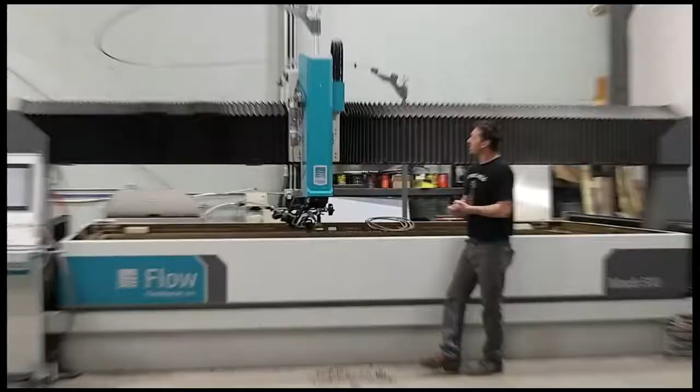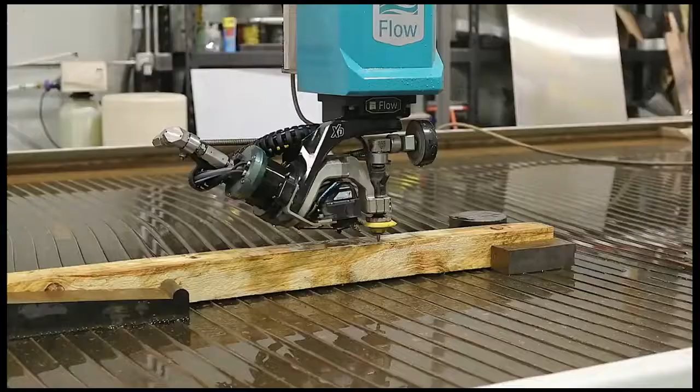Today we're going to be doing a question and answer about the Flow Mach 500 water jet that you see behind me. I'm going to be answering all your questions, from how did this big gigantic thing get into the shop? What kind of life support does it take to operate it? How do you operate it? What kind of material does it cut? How thick will it cut? How fast does it cut? And then just basically its overall operations. We'll take a part and we'll throw it in here and we'll actually cut it from start to finish, so stay tuned for that.

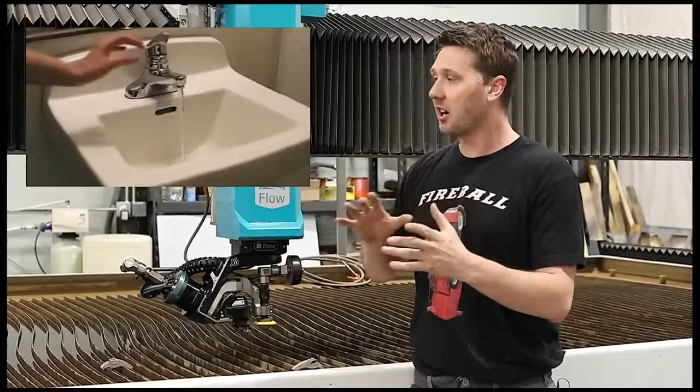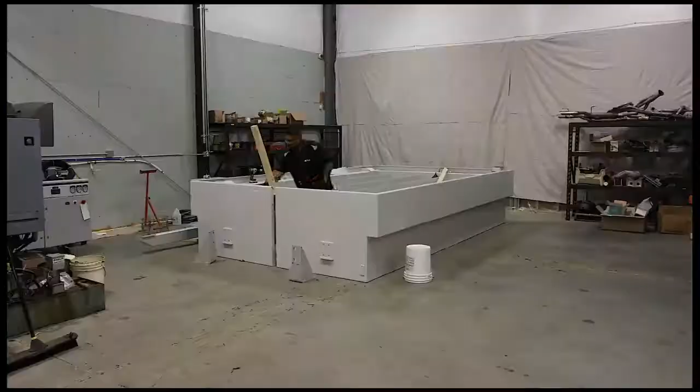So that leads me into the next question. As you can see, this machine is huge. How did I get it into this building? We'll walk through that question now. The machine showed up on a huge semi-truck. Each component was boxed individually in multiple wood boxes. We had two halves of the tank, the two supports for the gantry that get bolted to the floor, the Flow garnet hopper, and the 94,000 PSI intensifier pump.

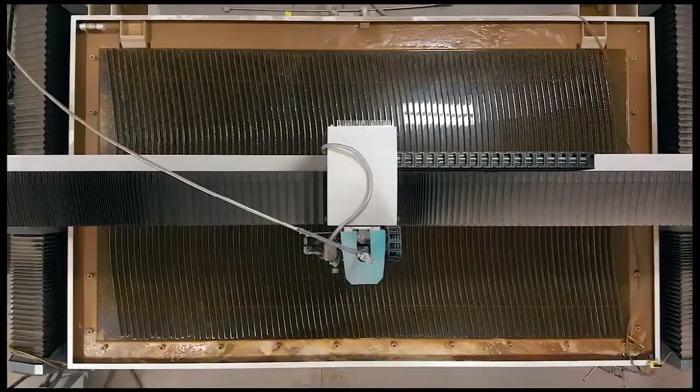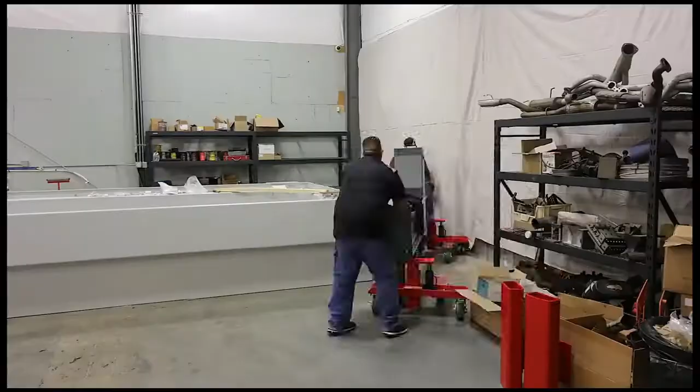The tank is approximately 20 feet long and 10 feet wide, with a cutting capacity of 8 feet by 12 feet. There was nothing special that needed to be done to the floor, as long as the floor was somewhat level. It's sitting on 3.5 inches of concrete. The machine itself, the moving components, are isolated from the water tank. It took about 2 to 3 days to install the machine.

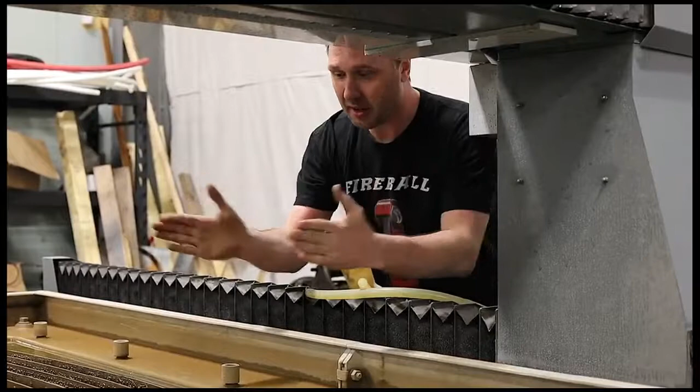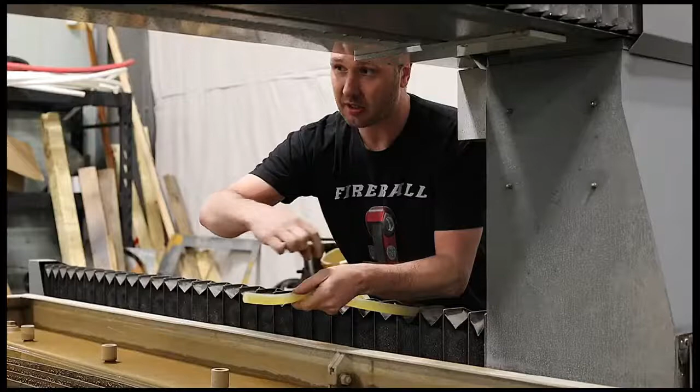We just bolted the two tanks together with this cool gasket. They smashed this piece of hard rubber. It almost feels like a glue stick. And it's one big, huge, long piece that drapes and goes in between the two parts, and then they get bolted together. And this piece of rubber, some fancy rubber, gets smashed into like a pancake, and then they put a piece of 1/2 inch flat bar so that the water jet doesn't cut it. And yes, this machine will cut the floor of this tank if it's held in one spot too long through the water. In some cases I've heard that customers that own these things will put AR plate down on the floor.

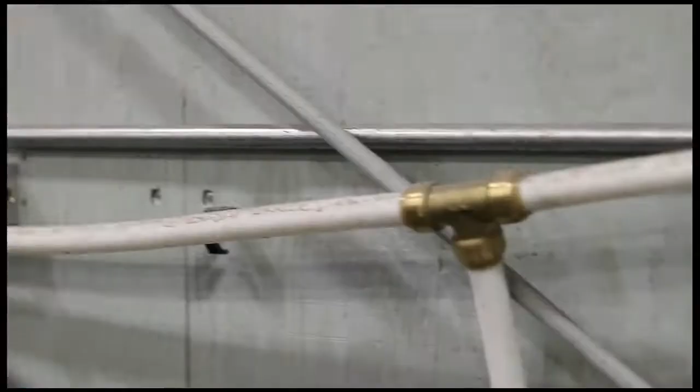One of the questions I get all the time is, how much water does this thing use? It is a water jet, right? But it actually doesn't really use that much. It just uses the water line from the building, which is about 15 gallons a minute, but it really only takes about 5 gallons a minute to support this machine. The first place the water goes from the building is this water filter over here. You don't really need filtered water if you've got clean water, but it just helps keep the components a little bit cleaner. And then from the water filter it enters the intensifier pump.

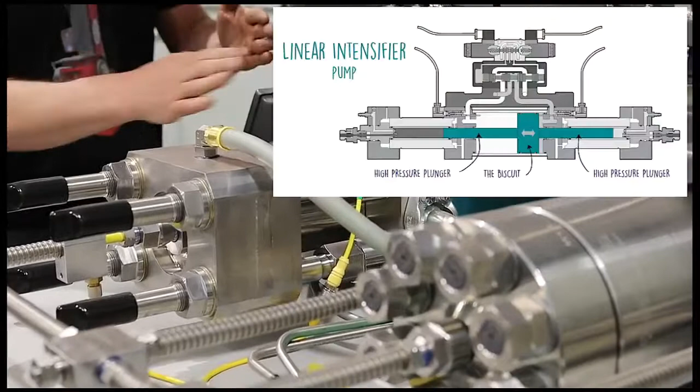This is where all the magic happens. This is what makes this cool, the 94,000 PSI intensifier pump. How this thing works is a 50 horsepower electric motor that's run off of 100 amps from the building. The hydraulic pump pressurizes the pistons inside here, and this piston moves back and forth. At the ends of those pistons it's necked down to a smaller rod, so we're gaining some mechanical advantage, and that is now compressing the water, sending the water out the lines and into this accumulator.

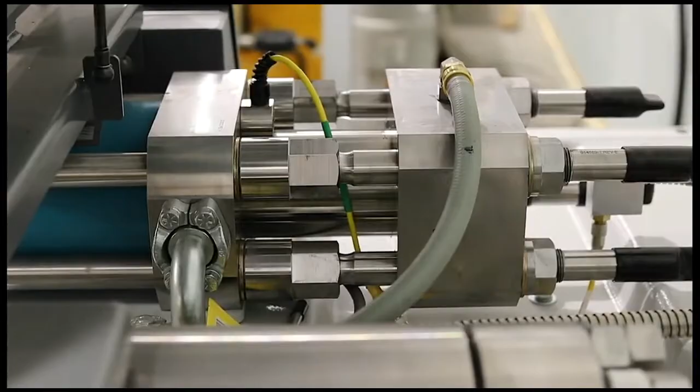The accumulator's job is to take the pulses out of the strokes from the intensifier and basically give the cutting nozzle clean, pulse-free 94,000 PSI water. Once you get to about 400-500 hours, it takes about an hour and a half, and you can rebuild the pump right here in the shop. And it's pretty cheap to actually rebuild these things. I just got back from a class to learn how to do it myself, so I'm excited to be able to maintain the pump myself right here in the shop.

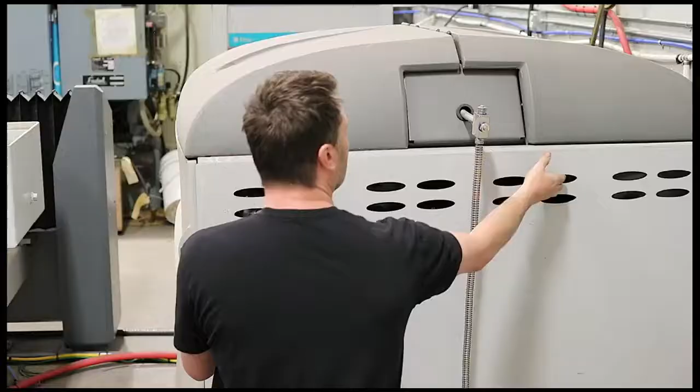Let's take a look inside at the hydraulics. So this is pretty cool. There's our big 50 horsepower motor. That thing's awesome. And then our hydraulic pump. What we also have is the water coming in from the filter.

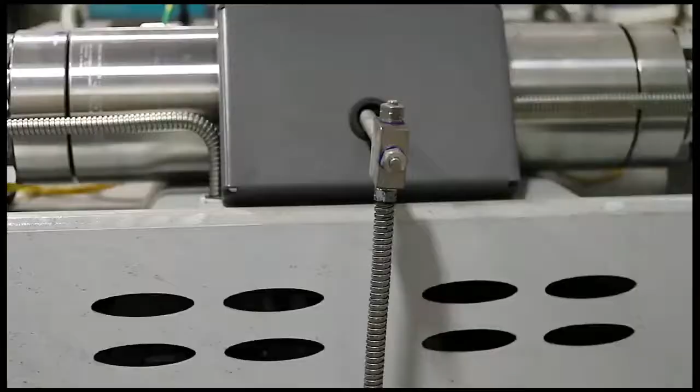It's going through a coolant system, and the coolant is just keeping the pump cool. The intensifier pump does not recycle tank water. It's always seeing clear, clean water. So out of the accumulator, the water is now pressurized and it hops into these hard lines, and this is it. This is where the water goes.

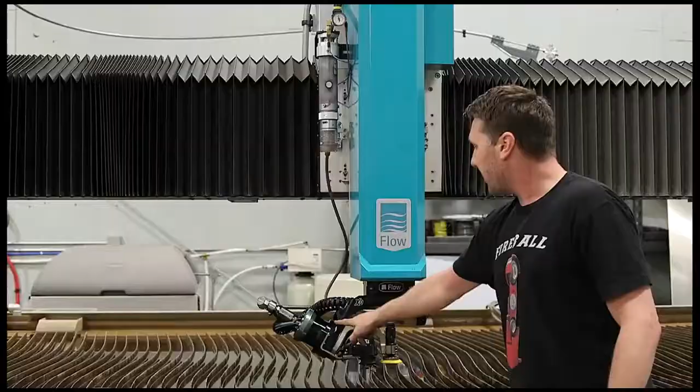It follows the hard lines up and into what we call the whip stand, this flexible flagpole, and it follows the gantry. When the gantry is moving, it gives that flexibility so this hard line doesn't get a kink in it. The water enters the movable head of the gantry, what we call the Z-axis, and it's still hard lined into this 5-axis XD cutting head, which is going to be able to rotate in 5 dimensions, and it enters this cutting nozzle right here.

The garnet and the water are mixing together, and it's exiting out of this nozzle at way above the speed of sound, combining into this stream, and this is what actually does the cutting. So now let's talk about how the garnet actually gets here also. It has its own path to the cutting head. So let's go talk about that now.

Why do we need garnet? Well, garnet is an abrasive. It's a hard natural mineral that gets mined, and the garnet is what's actually hitting the material and causing some erosion to whatever we're cutting. The more garnet you can throw at it, typically the faster you can cut, or you can combine it with water and speed up that garnet even faster and make it cut faster that way too.

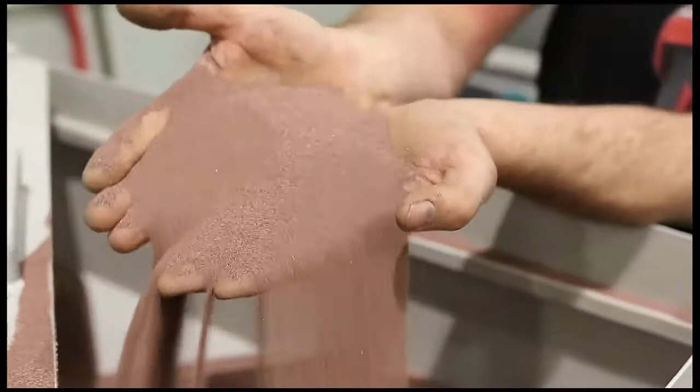So this is a 2,000-pound pallet. I choose to get the garnet in bags, so it's just easier to handle for me. You can get big sacks of just straight garnet that is not individually wrapped. Okay, this is what the garnet looks like. It's kind of hard to see, right? This will actually hold, what, 800 pounds? It doesn't look like it, but it'll hold quite a bit.

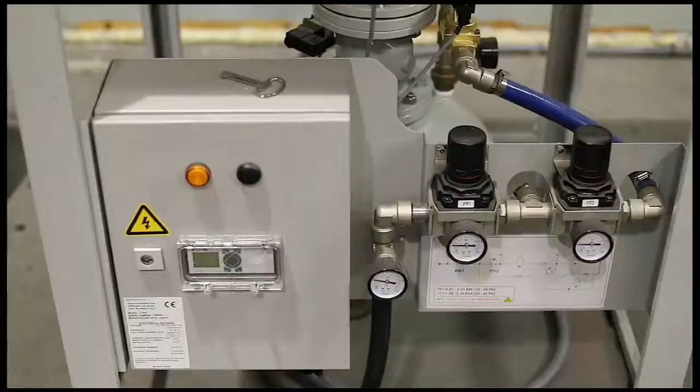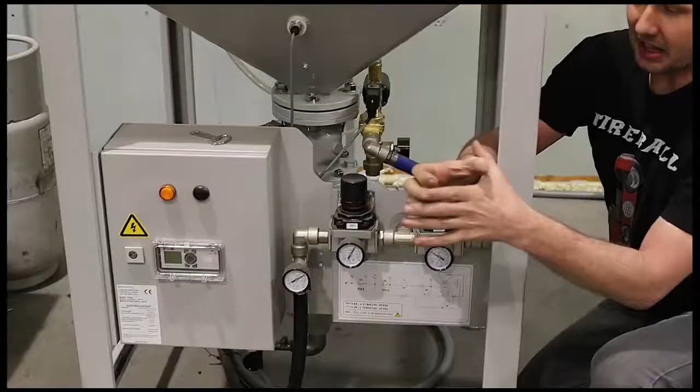The hopper has a warning light, so when it does get low, here's the sensor right here, it just beeps at you and says, hey, you're running low on garnet. You probably still have a good hour's worth of cutting when that light comes on, so it's just more annoying than anything. There's a diaphragm in here, like a bladder. It's a rubber bladder that squeezes just like that. When it's asking for more garnet flow to the head, the bladder opens up and it closes. And it does that from air pressure.

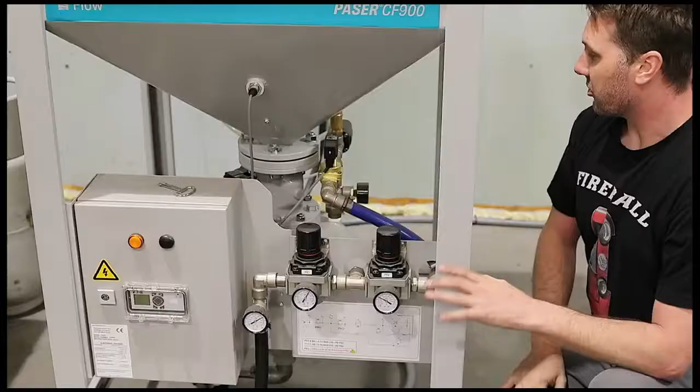So the shop air, you need quite a bit. I have a 53 CFM rotary screw air compressor here in the shop. I'm thinking you probably need at least 20 CFM to be able to run this machine and your other shop tools. And it needs clean, dry air to operate. But that's basically how it works.

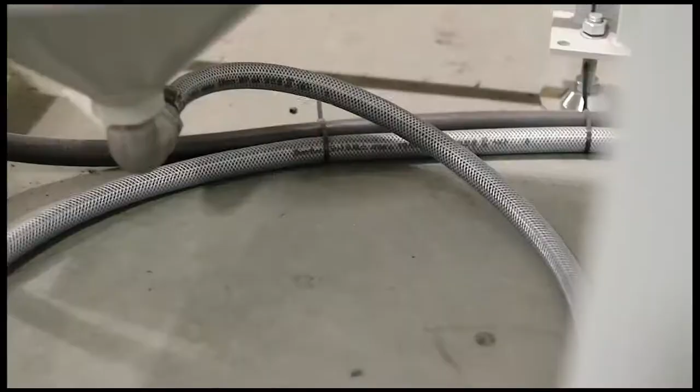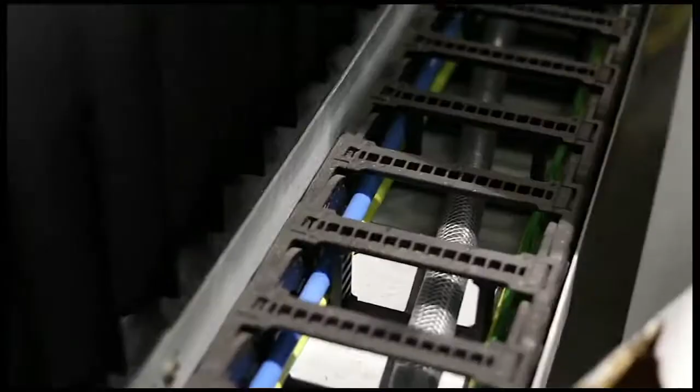When the computer control is asking for garnet, it gets funneled down into this hose. You can see it's just draped down here on the floor, and then it runs behind me in this clear hose. This is all full of garnet. It makes its way through the machine and through the track, getting pushed up by vacuum and air pressure into the machine and into the gantry, up and over and in. And you can see the garnet come into this little mixing chamber right here.

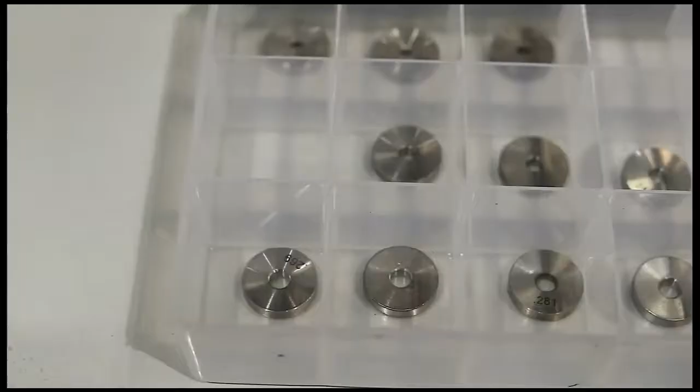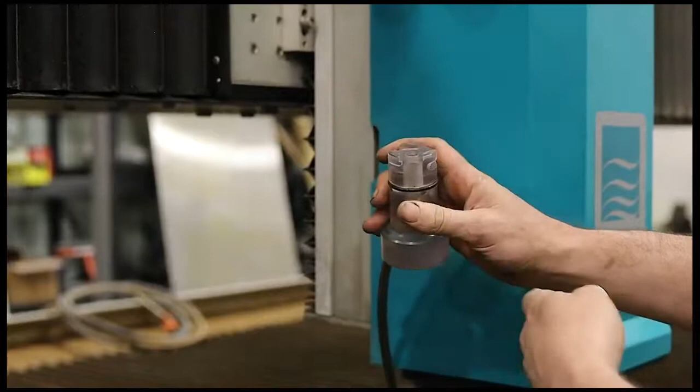If we take this off, you have what you call a metering disc. This is what controls how much garnet is getting sucked into the machine, because remember, this has a vacuum. It would suck your finger. Picture it like a carburetor in a car. You don't want to run too rich, and you don't want to be too lean either, because the computer knows how much garnet is supposed to be flowing. So it's going to change its speed according to the thickness of the material. And when you get a clog, you take this apart, blow the line out, and you're up and running again.

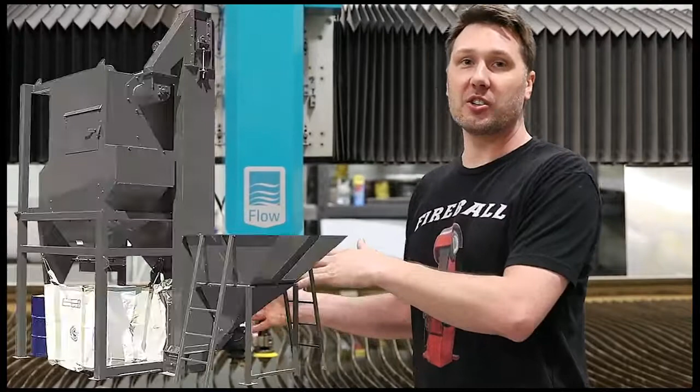Is the garnet reusable after it's come out of the nozzle? Can you recycle it? The answer is yes and no. There are machines now where you can clean the tank out and put this garnet in, and it will separate all the yuckies from the good. You can imagine what's in the bottom of this tank: aluminum filings, steel, wood, plastic, foam, a whole bunch of stuff stuck in with the garnet. Garnet is just one of those things. You want it clean.

That's one, you don't want to have problems. And two, when that garnet hits the material, it basically explodes. So it doesn't have the mass that it may need to be able to cut again. So yes and no, but mostly no, you cannot reuse it.

There's a few ways to get the garnet out of the tank, and so you can imagine that once the tank starts to get full, you're going to want to remove it. The cheapest way, kind of, is just to literally remove the slats and use a shovel and shovel it into a bucket or a trash can and then haul it to the dump. You can tell that every pallet of garnet that goes in is going to end up at the bottom, so that can take a while.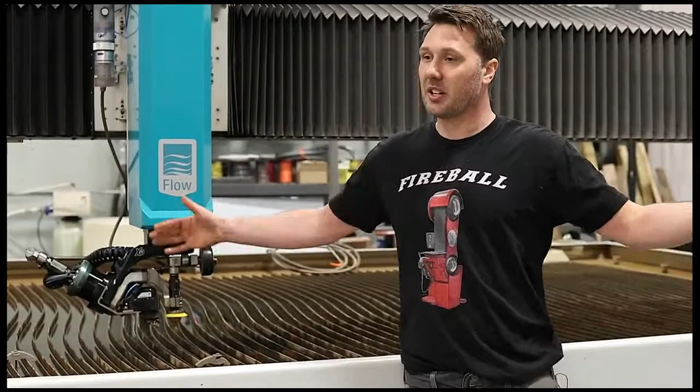Another way to do it is I've seen guys have an excavator. They'll literally scoop it out like it's dirt and haul it away that way. The next way is you can actually buy from Flow an auger system, where it's continually cleaning the tank basically and depositing the garnet outside of the tank into a big dumpster container in a big plastic bag, and then you can haul it away that way.

Or the best way Flow recommended to me is to bring in the septic tank guys or the vacuum suckers, and they'll literally just vacuum the slurry out of the bottom of the tank, and you do that bi-yearly, once a year, every 3 months, depending on how much garnet you're dumping into this thing.

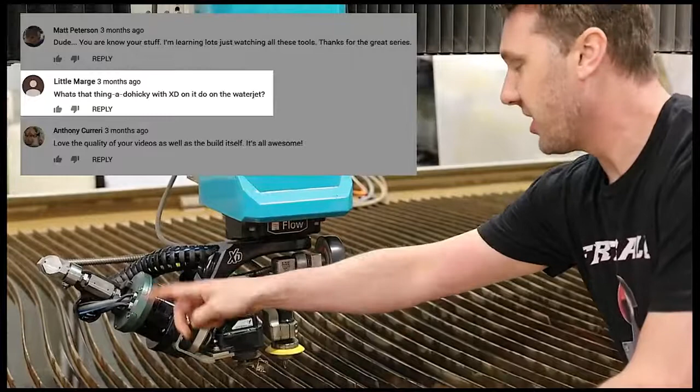You guys asked me, what is all this thingamadoohickey hanging off the side of the cutting jet? This is an XD 5-axis head, and so it tilts back and forth from this joint right here, and then it actually pivots up at the top right here. What this allows you to do is this cutting jet is now able to cut in any degree up to 60 degrees. So this can lay over 60 degrees at any angle.

This is an accessory that Flow sells. This is called the compass, and you put this attachment on the end here, and it goes around the nozzle, and it floats up and down, follows your material, and it helps keep you from crashing the nozzle into your part.

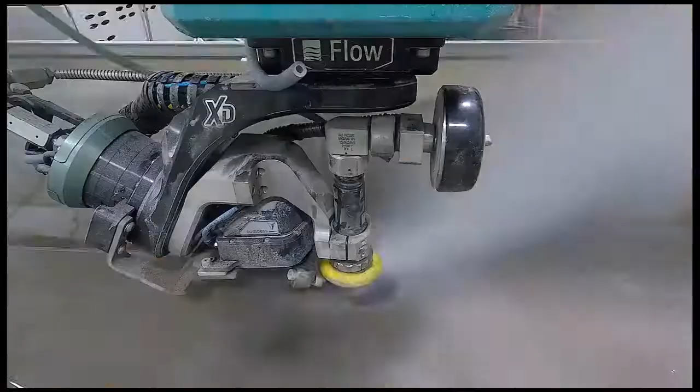The 5-axis helps with taper, because anytime you cut, the water is actually causing a taper. This has a compensation for removing the taper out of a part. So that's why you're seeing this thing dance all over the place, it's optimizing your cutting angle. Picture the cutting angle as the water hits the part, and then the garnet and the water lose speed, and it kind of trails off. So it's trying to keep that trail straight and perpendicular to the part.

This is what I call the blast shield, because this nozzle will lay over that far. It's kind of like an umbrella to try to keep some of the spray down. And these are just a consumable item for that. The cutting head has what we call an orifice, and this is the first thing that the water sees, and this is what actually builds up the pressure here, and it looks something like this.

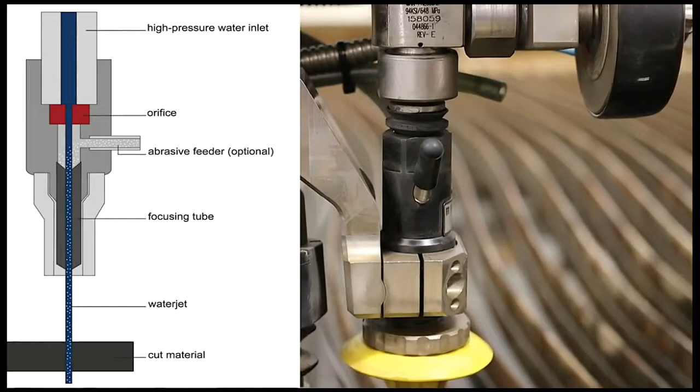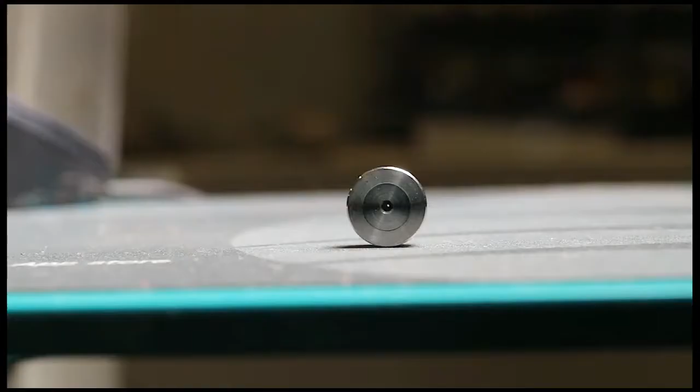Okay, so check this out. Inside that cutting head you have your diamond orifice, which is 10 thousandths of an inch. There is actually a little tiny diamond in there, and the water now has to move through this little tiny orifice. This is what pumps up the pressure, and this is like holding your thumb over the end of the hose. Now, there is a space between the diamond orifice, what sits up in here in this head, and the mixing tube. So because there is a space in here, it's going to actually cause a vacuum, because that water is moving so fast now, and it actually will suck garnet into this chamber.

There's a hose back here. This is the garnet flow. I can pull it off. There we go. You can see there's a hose that sits like that. So if we want to cut with garnet, we have the option there, and this is how it gets into the water mixture, is from vacuum between the diamond orifice and the tungsten carbide mixing tube.

This is an air actuator. This is actually what turns the water on to the nozzle. There's a little plunger in here that allows the water to go down, and this is air controlled.

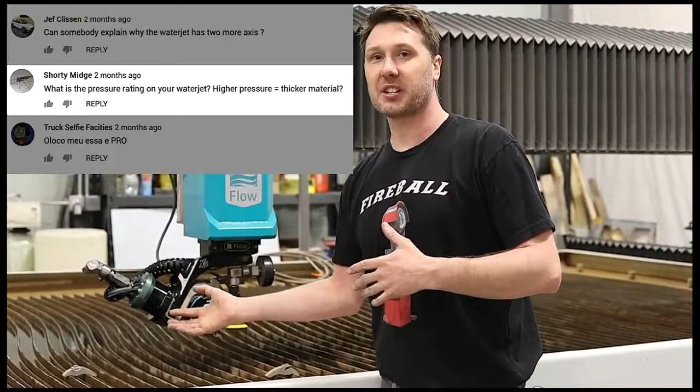What is the benefit of having 94,000 psi of water pressure and the garnet? To answer the first question, the higher the water pressure, it will help with cutting. So it's kind of debatable, that, oh, you don't need much water pressure, you just need to throw more garnet at it, because the garnet is actually what's doing the cutting.

It's like an abrasive or sandpaper. There really isn't any cutting action going on. It's more of just kind of sanding the thing apart. But there may be times where you don't need garnet as the cutting media. You can run just straight water. So a lot of food processing plants, if you can cut a material with scissors, you can run just straight water. So the higher the water pressure is, the thicker or more dense material you can cut with just water.

And it's debated that you don't need this much water pressure, but if you think about it, the evolution of water jet machines is they've gone from 20, 30, 40, 50, 94, and I know that they're working on 120,000 PSI water jet cutters right now. So it's naturally the evolution of the machine. The more water pressure, the better.

Having the higher water pressure doesn't necessarily mean faster cutting times. It's just going to help you with garnet consumable. It's going to help you not have to use so much garnet. This uses a little bit less than 1 pound a minute of flow rate of garnet. So if you can cut that down, it's going to save you money on cutting parts as your overhead costs.

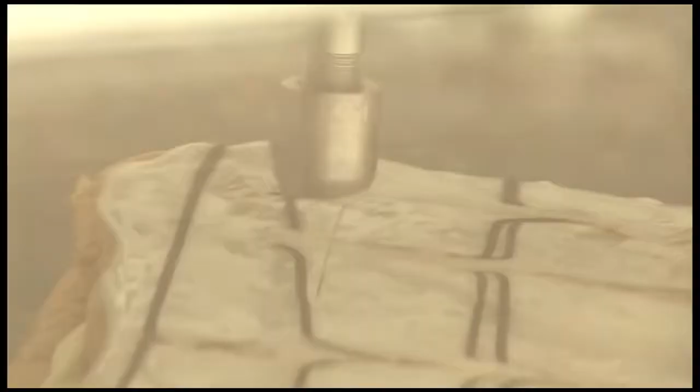One of the most popular questions that's come through is what can this machine actually cut? And the answer really is just about anything. Everything from metal to food. So this machine gets used in food processing. Believe it or not, your chicken nuggets that you eat are probably cut on a water jet. The cheesecake gets cut on a water jet.

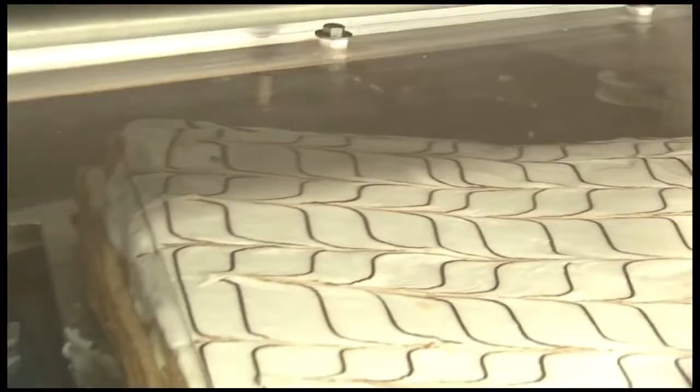Thick material like steel, no problem. This machine's capability is about 1.5 inches. I have cut a 3-inch thick plate with it. The thicker the material, just the slower it goes. What I've noticed is it's cutting about the speed of a bandsaw. I can change the surface finish how I want it to be. If I want it to be a smooth cut like that, I just slow the machine down a little bit. So that's some versatility there.

It's not limited just to cutting a piece of solid. You can stack sheet metal on top of each other and it'll just blast through layers of material. It really doesn't care. Like I said, if you're not careful, it'll cut through your material and through the floor of the machine if you keep it in one place too long. So it really is not limited by the thickness.

Tube steel, you can cut through one side of tube steel and it'll poke out the other side, which is good and bad. Sometimes if you don't want it to cut through a layer, you're going to have to add a diffuser material in between. So just picture that nozzle, that water, like a laser beam. When you shine it through, it's just going to keep going.

The material doesn't have to be clean that the water jet cuts. As you can see, it's rusty. There can be mill scale on it. It can have paint. It can have grease. It can have anything. It just cuts right through it. When the parts come off the tank, they are clean and bright, almost sandblasted like. So the first thing you want to do is hit them with a blast of clean water to get the garnet off, and then blow them down with compressed air to dry them, and then they normally don't rust after that. But the machine does not care if they're rusty or not.

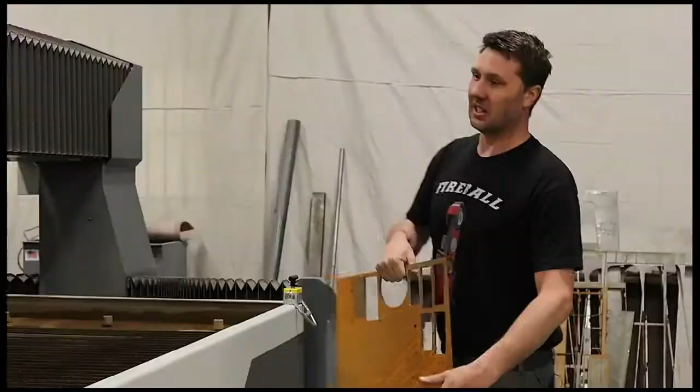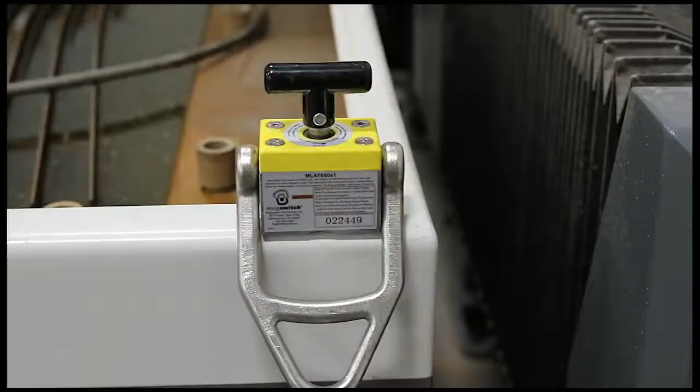Let's throw this piece of 1/4-inch plate on here. And the machine knows that it can't come too close to the edge because it'll actually poke a hole through the side of the tank with the water over traveling. So I just know from experience that I got to push it in more. One thing you have to talk about is the material handling. My favorite tool is this magnet, which I keep on the side of the machine all the time. This little magnet will do 250 pounds.

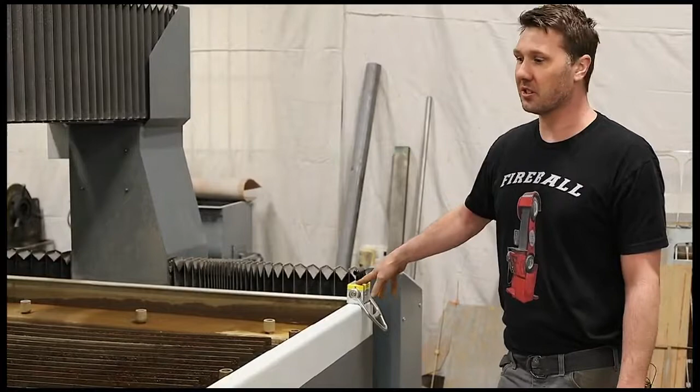This is a MagSwitch product, and it will do, I think, 250 pounds, one of them, which is fantastic. One of the other reasons I like its size is that I can stick it to a part that I've cut out, and I can just grab it and pull it out too. So it's really cool for that. So if you have a small plasma cutter, this is a great option instead of a forklift to use.

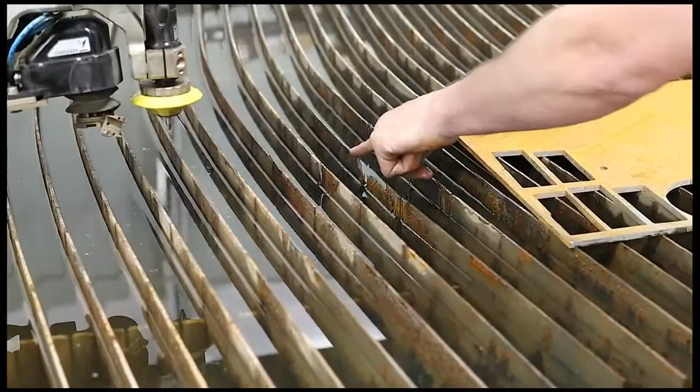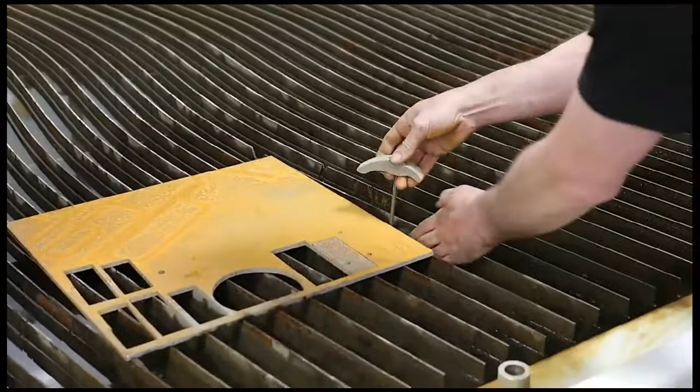Flow gives you these cool little toggle clamps, and they sit on top of these 6-inch ribs. These are disposable, or they're a consumable product. You can see it just blasts right through the support ribs, and they're in an S curve so that there's no vibration. And this goes underneath the rib and then holds your part down. So it just kind of goes down like this. You give it your 90. And then of course you run the screw down.

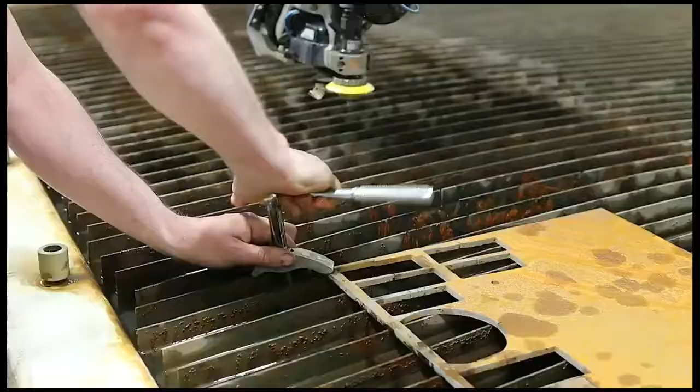First thing I do in the morning is I come and turn the main power to the pump on, and then I come to the control panel on the side of the machine and I give it power. The control panel has a hard drive that's stuffed underneath here, and all the exterior controls are waterproofed. We have basically two programs. We have the design and drawing software, and that's called FlowXpert. And then you have Flow Cut, which is how we control where we want the machine to go.

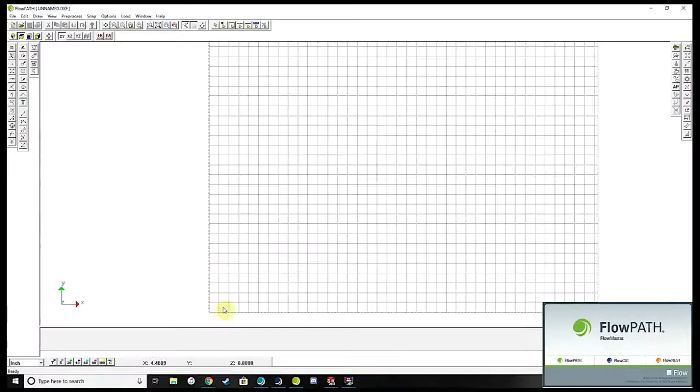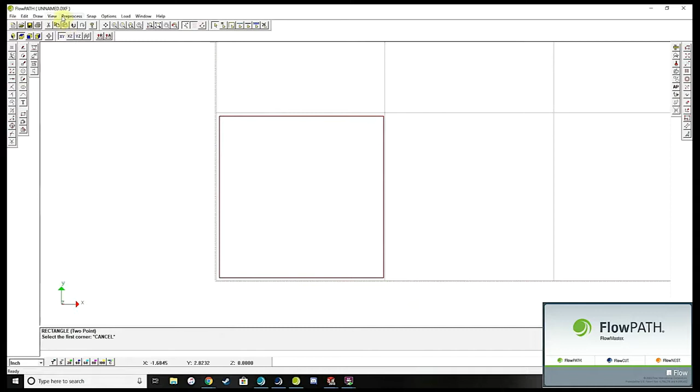So the first thing I do is I go into FlowPATH. So let's just draw a simple 2x2 square. Okay, and now once I have the square drawn, I want to select it, and then I want to auto path it. So basically it's creating a path; it's going to talk to the machine and tell it where to go. And then I'm going to go into FlowCUT. All I got to do is just import it. So now here's our square that we drew.

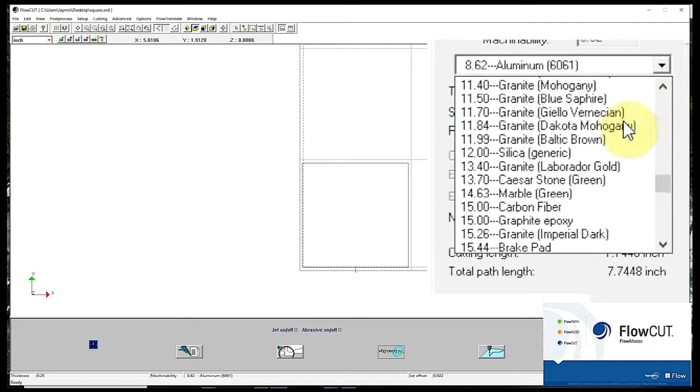I want to give it its parameters. So you type in how thick you want to go. And then you select the material that you're cutting, and it's labeled from easiest to cut, rubber. You can see all these different programmable materials: Delrin, fiberglass, Kevlar, micarta, phenolic, nylon, quartz, limestone, brake pad. Literally a brake pad on there. It's funny. And these are all what Flow has set up for speed, how quickly the machine should cut for the hardness. And we're still scrolling all the way to gray iron, stainless steel, and then the hardest is tungsten up here, and PCD, whatever PCD is. Somebody in the comments will know what PCD is.

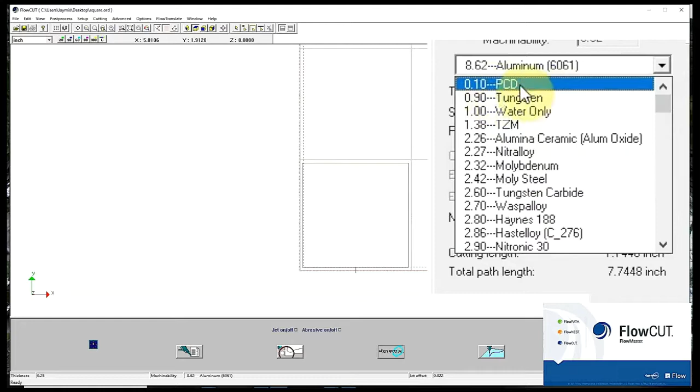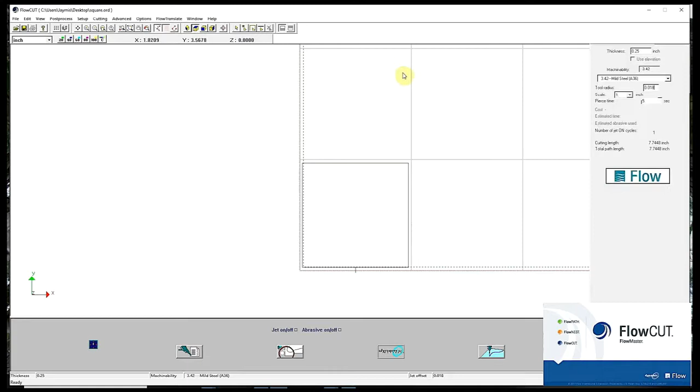Let me know. So we're just using mild steel. So I'm going to select, whoops, passed it, mild steel right there. And then the tool radius, this is the actual diameter of the water that's coming out, and I know this is 18. Okay, and then up here in the corner, these are our percentages. So 20% being the best, 100 being the fastest, and of course you can do custom speeds in between there. So let's do 60% cut speed, and I hit OK. That's what I want to do, and I hit Run Machine.

And when we first started up, we wanted to zero all the axes, which it just did. And as you can see, I can move it around with my controls on the computer. I can move it left, I can move it right, back and forth. So before we get started cutting this little square out, I want to give you an audible sound of the garnet as it breaks the sound barrier.

So I'm going to bring the cutting head about 12 inches above the water, and I'm going to hit water on. So water is only going to be coming out of the nozzle, and then I'm going to hit the button turning abrasive on, and you're going to hear the difference between the two. So water on versus water and garnet. You're going to hear the garnet break the sound barrier. So let's do that right now. It's kind of fun. Okay, pump's coming on. Water only coming on now. Okay, abrasive on.

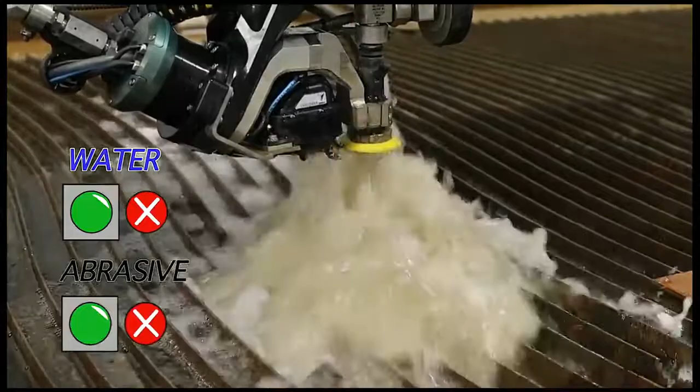Okay, abrasive off. Water off. Pump off. I like to do that test in case I have a clog inside the nozzle, and so I make sure that my garnet's flowing good. If I don't have the compass running, that nozzle can get too close to the surface and plug the mixing tube up to where you've got to take it all apart and clean it back out again. But this is a test that I like to do just to make sure my garnet is flowing.

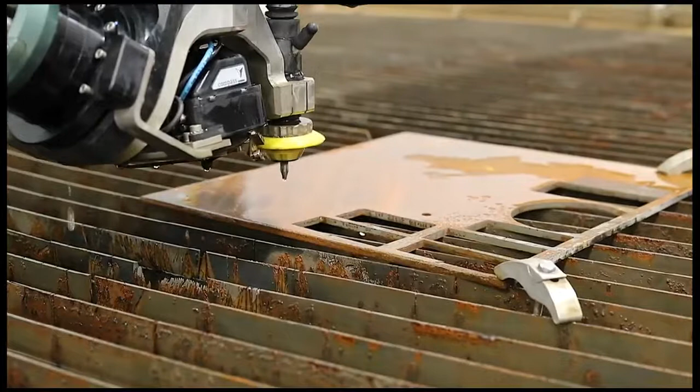So the first step that we've got to do is find home. What I do is position the work where I want to do my cutting, and I drop the cutting head down to 100 thousandths off the work surface, and then I zero it and call that machine home. That will line everything up so the computer and the machine are now thinking they're in the same place. And then I just find out where I want to cut.

So let's just bring it to the edge, right about there. And now basically we're ready to cut. All I have to do is turn the pumps on and hit go. We're going to make a first cut. We're cutting this square. Pump on. Here we go.

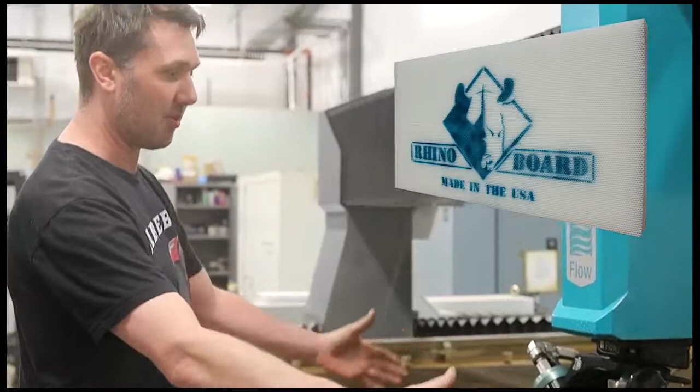So that took only a few seconds, and what you can see is that the part fell out. What we can do is add what you call a little tab, and it's just a little piece of metal that's going to hang on so it doesn't fall in the tank. So this is another drawback of a water jet machine, that your parts will fall into the abyss. We can put a backing board underneath. It's called a rhino board. It's kind of like a honeycomb plate, and it'll prevent that from happening too.

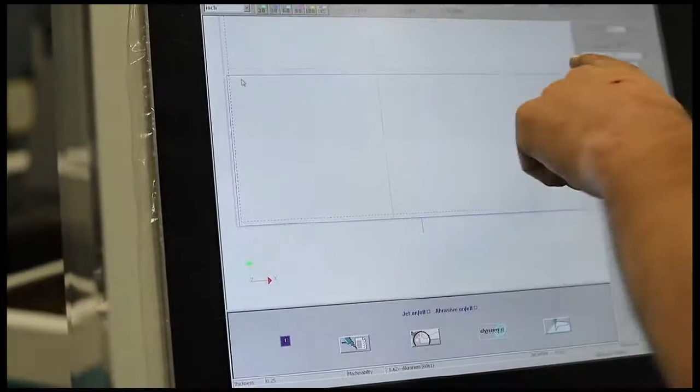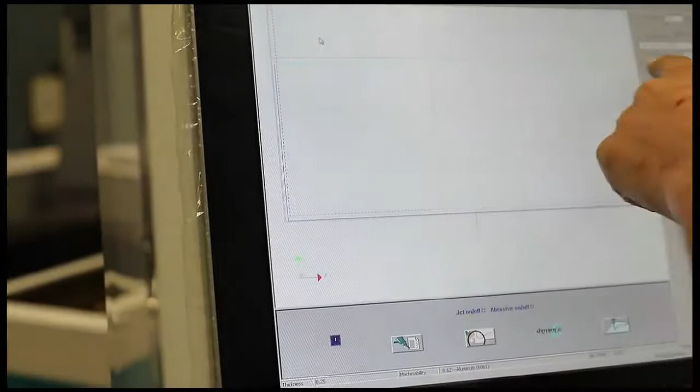So here's the square, and what I like about the software too is I can pick this entity and say I want to give it a specific cut quality. So maybe this edge is going to be visual or something, so I can select it and hit 20%, which means it's going to have a really good cut quality. And let's just walk it around. Let's select this one at 40%, this one at 60%, this one at 80%, and this one at 100%. So when this part comes out, we'll be able to look at all the different cut qualities.

All right, let's raise the water tank. Inside of this tank is a steel bladder that we can pump full of air, and it's going to displace the water inside the tank, so we can raise and lower the water pretty quickly. It should be a little bit quieter, and we're going to cut this rectangle out now, so let's try that. That was a 100% cut right there. Now we're going to do a 20% cut, so it slowed way down.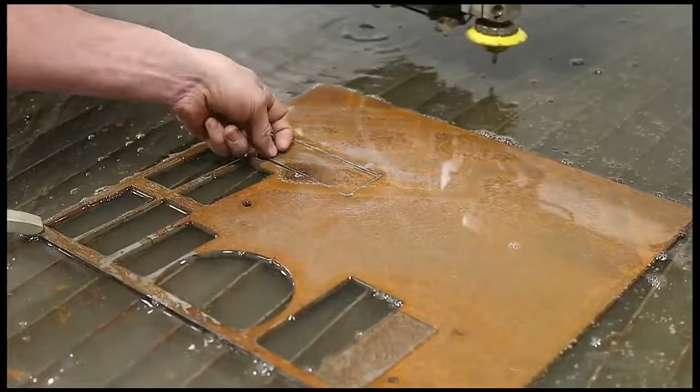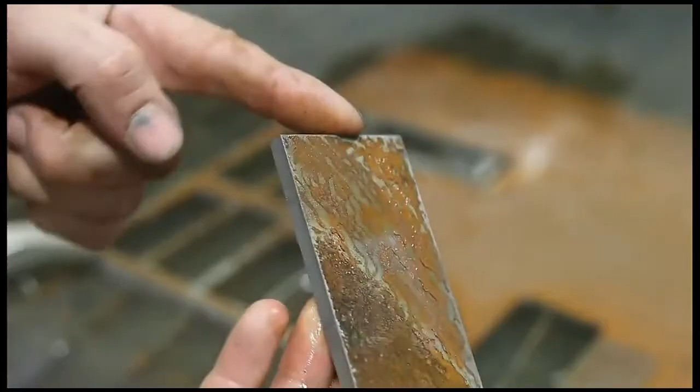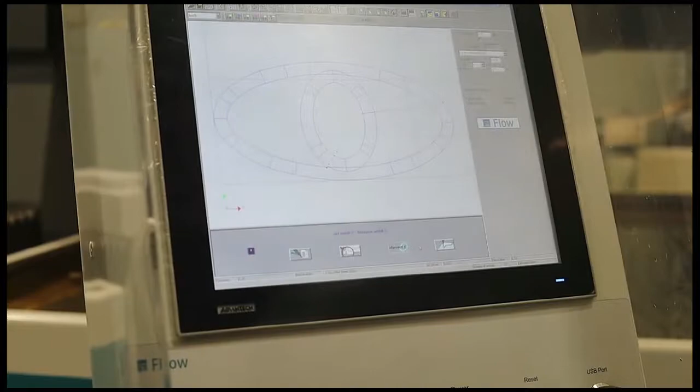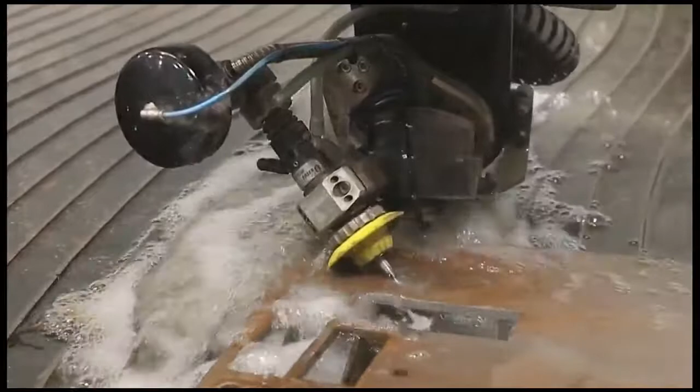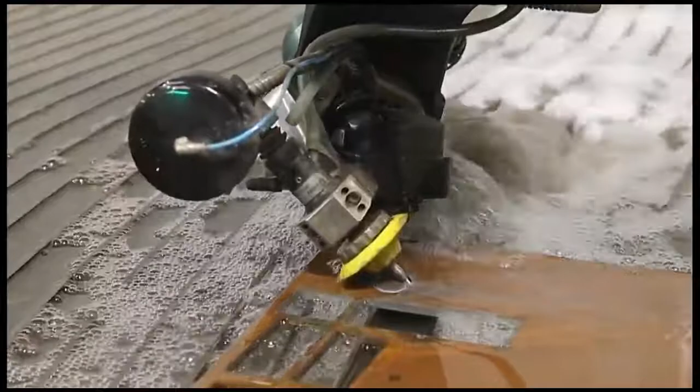Okay, we're going to make this funny elliptical eye. This is a 45-degree chamfer on the outside and inside on this 1/4-inch plate. This would be super hard to replicate if you didn't have a machine like this. I wouldn't even know how I would make this part. So let's cut it out. Woohoo!

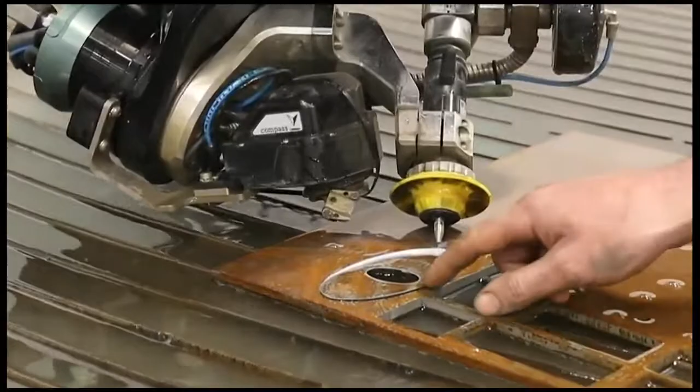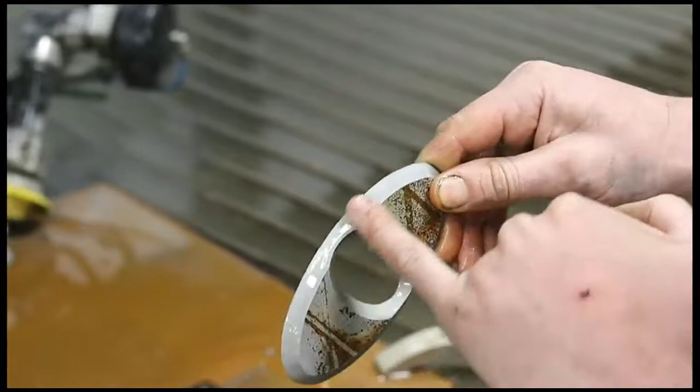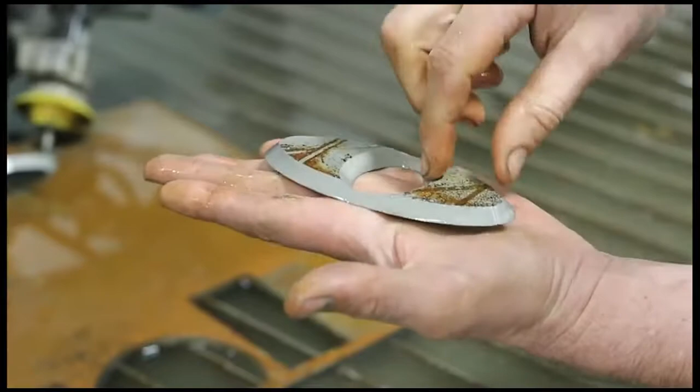So here's something cool to look for: you want to cut it upside down so you don't trap the part underneath. This is just a random sample part for fun that I sketched up real quick. But this is a 45° on the ellipse, so that's pretty cool. So when it's cut upside down like that, the part isn't trapped. If we were to cut it like this, which the machine could do also, we would have to unbolt the plate to get the part out. So you've got to be smarter than the machine, I guess. You can get yourself to trap parts.

But how cool is that? Man, the capabilities are just mind-blowing. And that edge is razor sharp. Pretty cool, huh? All right. Same test through some wood. That's scary.

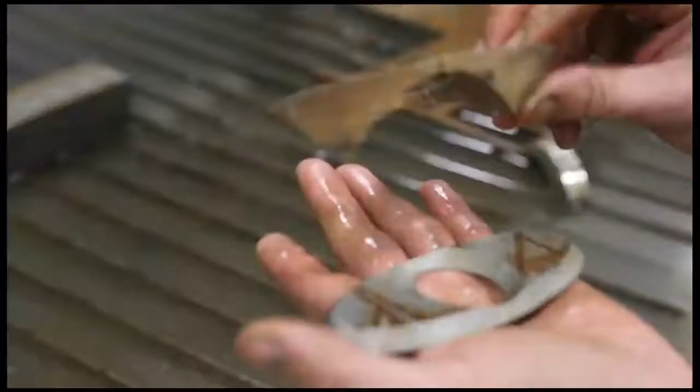Whoa, now that was so epically cool. Look at that. What was cool is this was supposed to be calibrated for 1/4" plate. Okay, but that was just pretty cool. I've never done anything like that before. I normally don't goof around with this machine like that because this is not a toy. But yes, it'll cut wood.

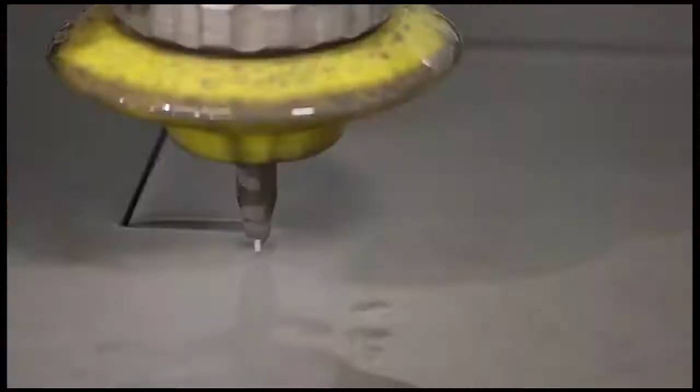As you guys can see, it's a highly versatile machine. It may not be as fast as a laser or a plasma cutter, but this offers a lot of versatility for me here in the shop. It's also going to be making production parts for me in the future, and it's going to help me with some prototyping in between those production runs. That's kind of why I chose the waterjet, for its versatility.